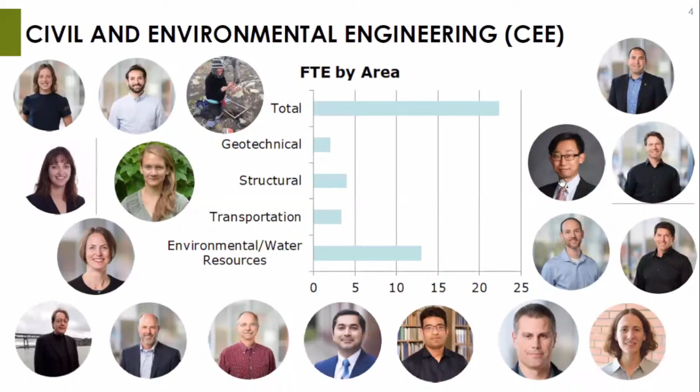Despite being a relatively small department, we do have quite a few achievements I'm very proud of. For example, my colleague at the top left corner, Dr. Diane Moug, just received the prestigious NSF CAREER Award, which is a kind of acknowledgement of her work in geotechnical engineering. At the bottom left corner, we also have Dr. James Pankow, who is a member of the National Academy of Engineering.

In terms of statistics, our department has on average an annual research expenditure of about 2.8 million. We're home to the largest earthquake shake table in the Pacific Northwest - for those not familiar with the terminology or geography in the US, that's mainly Washington State, Oregon State, and part of Idaho, sometimes also including Alaska.

We're also home to two of the most widely used simulation models for water quality. Every summer we have a lot of folks coming from all over the country for training camps to go over that software. We're home to the world's tallest barometer - that's the device you see first entering our engineering building. And as I mentioned, we have Dr. James Pankow, who has been doing amazing research in environmental chemistry and water resources, and who is a member of the National Academy of Engineering.

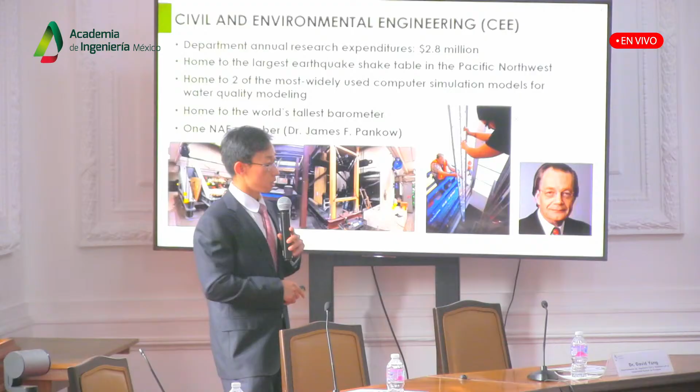This is an area that we started with my colleague, Dr. Thomas Schumacher, to fill in the gap of traditional civil engineering curriculum that is focusing primarily on the design of new structures. So we want to have some training for the future engineers to know how to handle existing structures, specifically not only the old infrastructure, but also a lot of the historic structures, where that preservation stands for.

My colleague Thomas Schumacher just got back from a trip to Egypt, where he did non-destructive testing for the pyramid, and interestingly found a previously unknown tunnel inside the pyramid thanks to their research. So that's something that we've been doing.

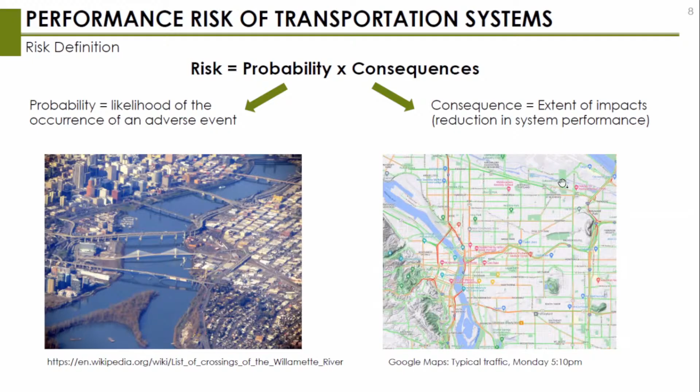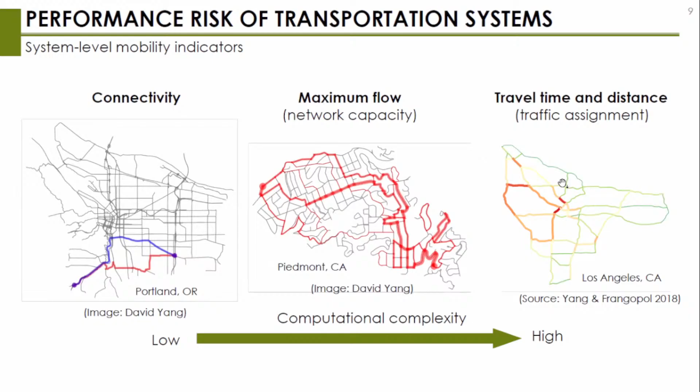That can be quantified by a wide array of performance indicators, from simple connectivity analysis to more involved transportation analysis demanding traffic assignment. All of those have been used in my research, and they have their own use. I'm happy to talk a little bit more about what indicator is the best for different use cases.

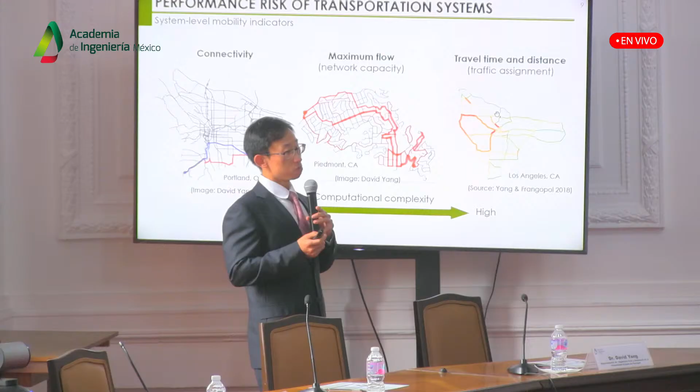But no matter what performance measure you use, you will face some real challenges when you are trying to do performance risk assessment. That brings us to the first topic: what are the performance risks for infrastructure systems under so-called catastrophic events?

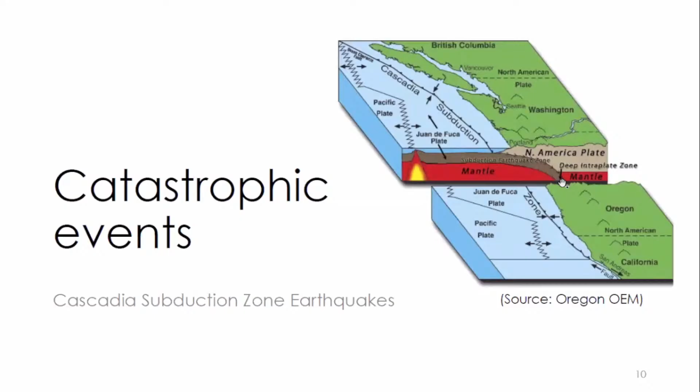The event that is relevant to us in Oregon, in the Pacific Northwest, is the so-called Cascadia subduction zone earthquake. Those are earthquakes caused by the subduction between the two plates, ranging all the way from British Columbia, Vancouver Island, all the way down to Northern California.

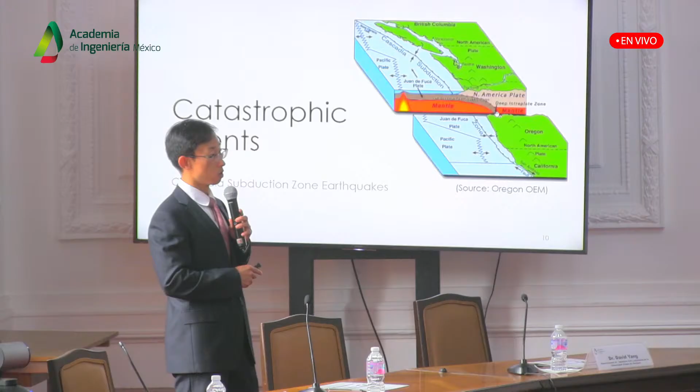This Cascadia subduction zone has shown to be really catastrophic in the sense that it can create earthquakes up to magnitude 9. The last time this happened was about 320 years ago, and there is a very high likelihood that this catastrophic event may happen again in the near future in our region. So our work is trying to figure out what will be the risk and what we can do to prepare for such catastrophic events.

So just a toy problem here to illustrate what are the challenges that you may face when you do performance risk assessment. The main challenges are first methodological.

So for performance risk, what we call those are risks that are not additive, meaning that you cannot do a risk assessment for one structure at a time and then add them together to form your system level performance risk.

So the toy problem here on the right shows that if you have this simple transportation network, if two bridges fail, by inspection, you know the traffic flow capacity will drop to 0. So the traffic flow capacity will drop from 5 to 0. So the risk is, the consequence here in this case is 5.

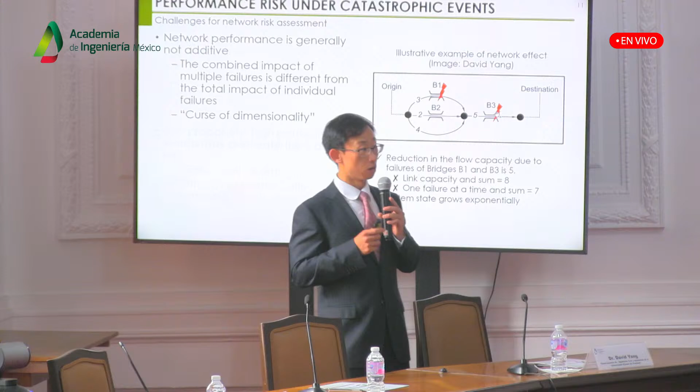However, you cannot recover this number 5 by doing one structure at a time analysis, no matter what performance indicator you use for that specific structure. So basically, this means that for performance risk, we really need to know the states of all the structures in my network in order to quantify the consequence.

So that brings in the challenge, computational challenge. And the second challenge is, when we are talking about risk assessment, there may be cases when you have a very low probability event, but very high consequences. We call those gray swan events. So that will make traditional sampling approach, typically Monte Carlo-based approach, impractical.

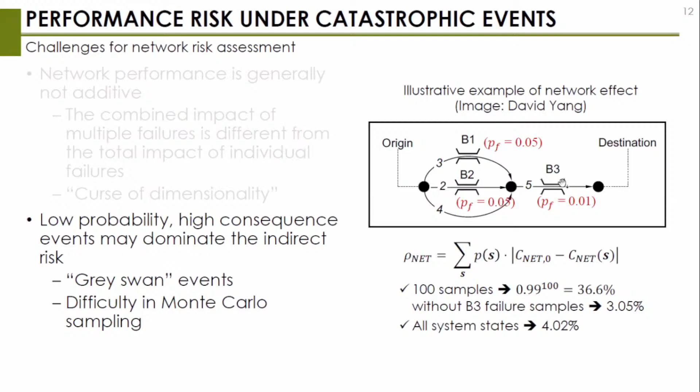So again, looking at this toy problem on the right, you see that if I put a failure probability for all these 3 bridges and then do a Monte Carlo simulation with 100 samples and evaluate the system risk, there will be a high chance that you don't have any failure samples for bridge 3, which will cause the underestimation of your performance risk. So that's another challenge of performance risk assessment for infrastructure system.

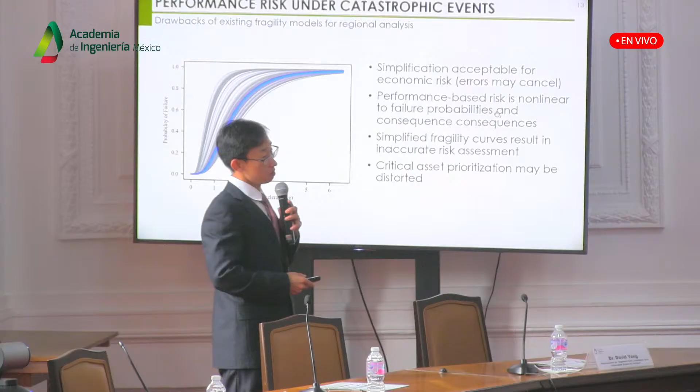So the other question we are trying to investigate is, for risk assessment, we need to know the fragility models. Traditionally, the fragility model tells you, given a so-called x-axis, which here is the intensity measure of a hazard, earthquake specifically, what is the probability of a structural failure or structural damage state?

So previously, for regional risk assessment, this is usually done by averaging out a group of structures and use that typical fragility curve here shown in blue to represent the likelihood of structural failure. This is okay if you are looking at economic risk, where you can add the probabilities of failures of different structures together to form your system risk, because the overestimated failure probability and the underestimated failure probability can just cancel out when you add them together.

But as I mentioned before, for performance-based risk assessment, it's a nonlinear function between the risk and the failure probabilities and the consequences. So that's why we want to know what are the implications of using this type of simplified fragility curves when we are doing a performance risk assessment, in terms of both the estimated risk as well as what will be the impact on the ranking of importance of different structures. So that's another question we're trying to answer here under catastrophic events.

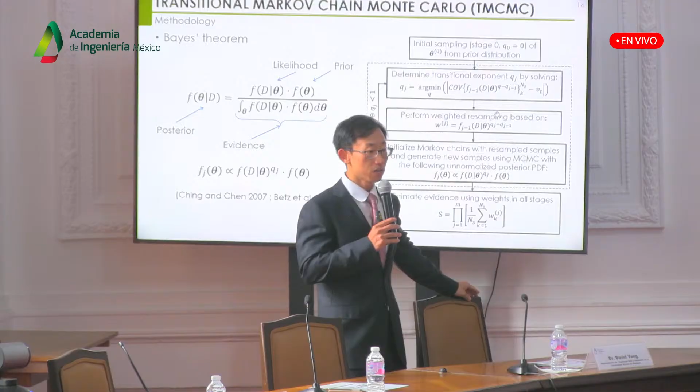And the approach we took here is the so-called transitional Markov chain Monte Carlo, or TMCMC. This is not an approach invented by us. Credit goes to Ching and Chen in 2007 and Betz in 2016, who first created or invented and then further refined this approach. It was traditionally used for, as you can guess, Bayesian updating, where you want to get the updated model parameters given some system output.

So here we chose this algorithm for performance-based assessment mainly for its great capacity to estimate the denominator in your Bayesian theorem, which we call evidence. So later on I will show. Our contribution is to build the connection between this evidence term in Bayesian theorem and the network risk assessment that we are interested in.

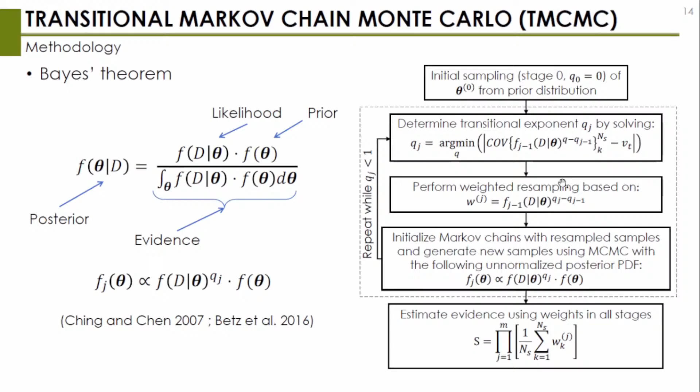So the modifications we implemented here is to adapt this TMCMC algorithm, traditionally used for Bayesian updating, to system risk assessment through the following 3 major steps. First, we created a transformation function to convert the discrete failure or damage state of a structure to a continuous state using a hidden variable.

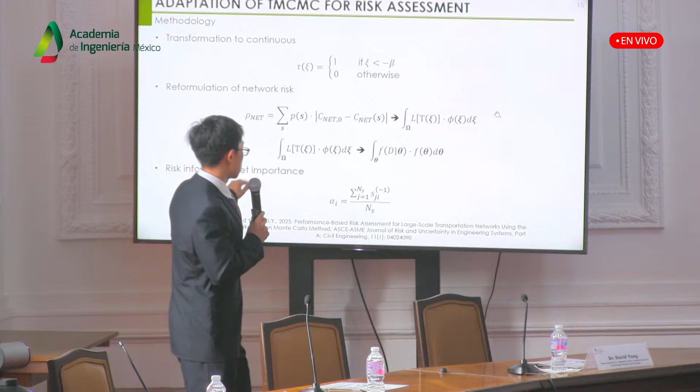That allows us to go to the second point, where the system risk can be formulated as a high-dimensional integral. And that integral, if you take a look at the second line of the second bullet point, you can see that it looks very, very similar to the evidence term that I presented previously in the previous slide.

So that allows us to use TMCMC to do the high-dimensional integral to solve the risk assessment problem, which will allow us to address challenges of curse of dimensionality as well as the existence of rare events.

And lastly, not only am I able to know the system performance risk, I'm also able to use this approach to know which asset or which bridge is more important in terms of carrying the system performance of the infrastructure system. So if you're interested in details, I listed the paper that we just published with my students.

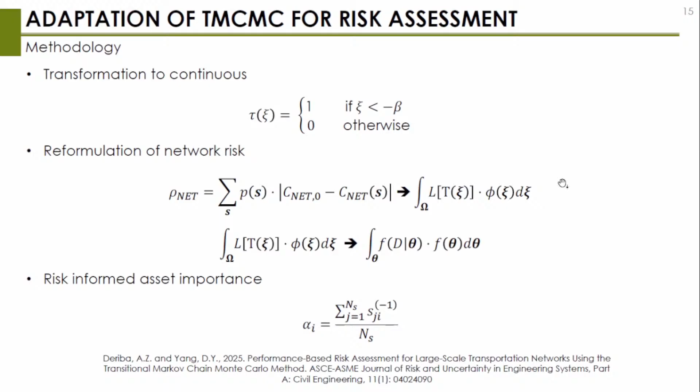Over there you can see a little bit more details about this approach. We use this approach for accessibility risk assessment in our region.

Accessibility risk here is mainly to evaluate the accessibility of communities to hospitals right after the CSZ event. We take a very simplified approach, a modified Hansen integral index, which is essentially the inverse of closest distance from a community to a hospital to measure the accessibility. And we use the change of accessibility to show what is the risk to our communities from the earthquake.

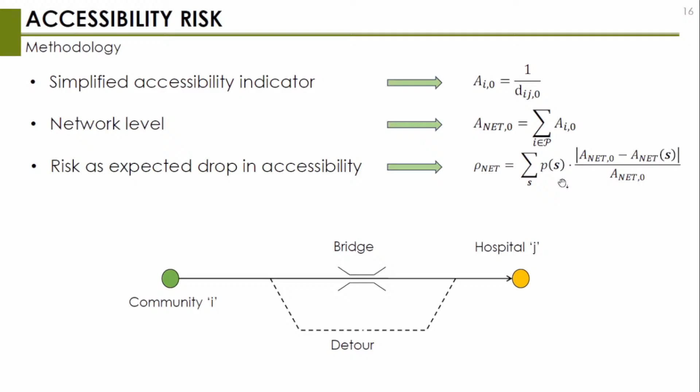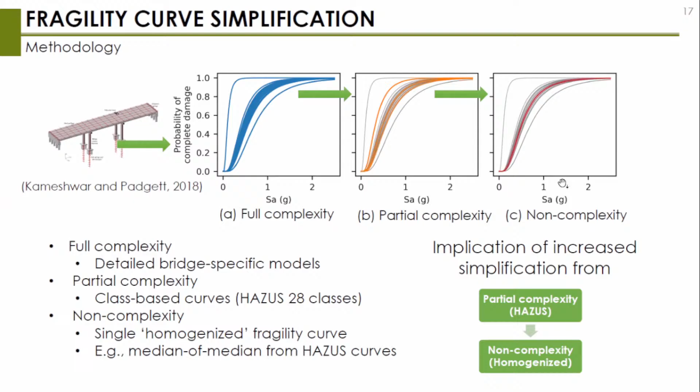The last question we want to answer through this case study is to see what is the impact of fragility simplification, as I mentioned before. Here we're going to compare the fragility curves from HAZUS with what we call the homogenized fragility curve, which we just use one single fragility curve to represent the failure probabilities of all the bridges in the network. We want to see what is the downstream impact of that simplification.

We use this approach, the TMCMC and the two sets of fragility models for a case study in Portland metro area. That's the boundary of our study area that includes the city of Portland, the neighboring counties, as well as the city of Vancouver in Washington, just across the Columbia River.

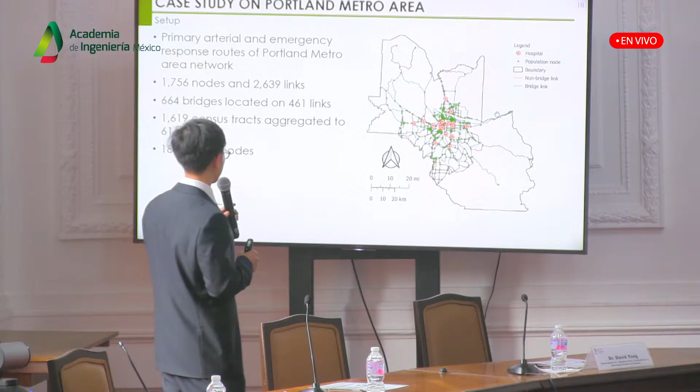What you see here are the arteries and the emergency response routes within this metro area, as well as the 18 hospitals that are located in our region. This network includes about 1,700 nodes and 2,600 links, with 664 bridges located on 461 links.

So it's a relatively realistic scale. It's more realistic than a lot of the academic examples that we have been using.

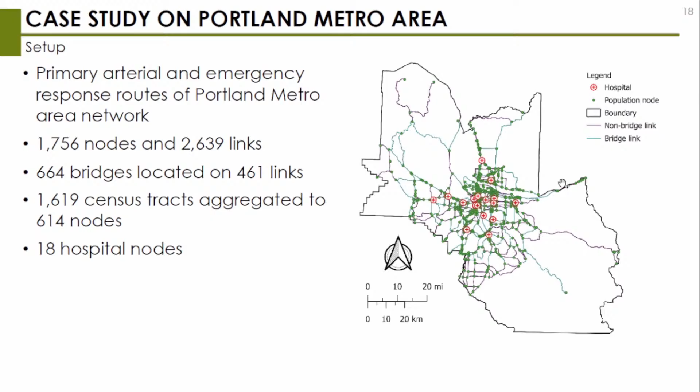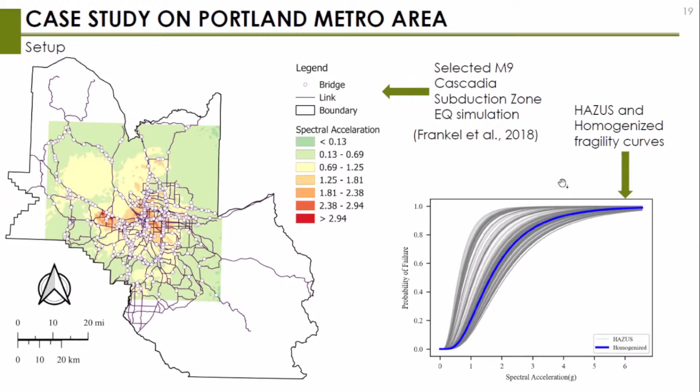For the hazard on the left here, what you see is the map of spectral acceleration extracted from the M9 project. The M9 project is an NSF-funded project that happened at University of Washington that wrapped up a few years ago. They generated a synthetic ground motion record for the Pacific Northwest region under the CSZ event. They considered a lot of the geology factors as well as the mechanisms of earthquakes to arrive around 30 scenarios of what will happen under the CSZ event.

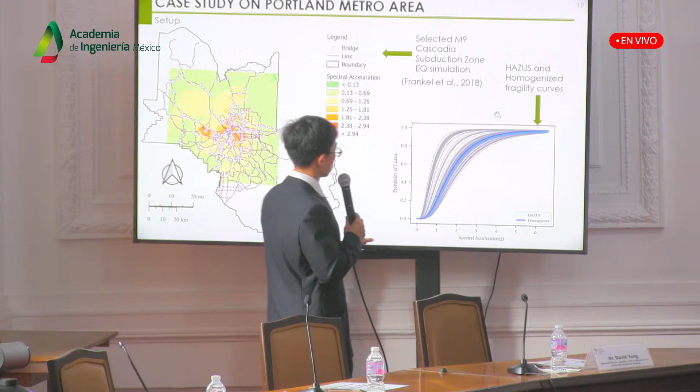We use this as input and consider the two sets of fragility curve. One is the HAZUS fragility curve that is relatively okay in differentiating the different structural failure probabilities, and the homogenized, this blue curve here, simply derived from averaging all the fragility curves for the structures in the region.

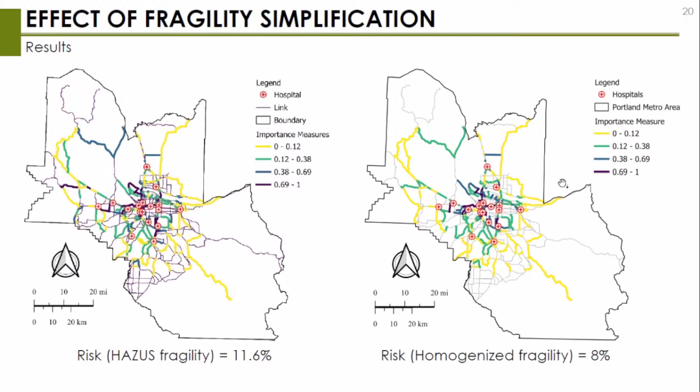For the figure on the right, what you see here are the same results using the homogenized fragility curve, where you only have that one averaged fragility curve for all the links, and you can similarly get the accessibility risk. In this case, this risk will be underestimated. Also, you will get the map of link importance.

Visually, you can see that using a homogenized or simplified fragility curve, the important links are more concentrated in the downtown core. But when you are using the HAZUS curve, where each bridge gives you a different failure probability, the important bridges are more spread out. So that's one of the implications of using a simplified fragility curve.

We quantified this by comparing the rankings of different bridges, comparing the importance factors of different bridges using the Spearman correlation coefficient. For decision making, what is really important is the top rank bridges, meaning the most detrimental, the most critical bridges in that network.

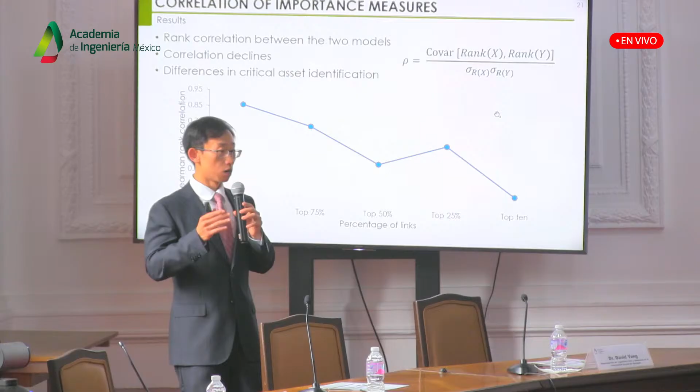As you can see, as I put my scope of focus more and more into the upper tail of the important bridges, the correlation starts to decrease, which means that using a simplified fragility curve will not give you a good ranking of your bridges in terms of importance. So it will kind of distort how you rank the importance of bridges, and have downstream practical implications, meaning that some of the important bridges will not receive resources for retrofitting.

So here's a more specific view. This is the top 10 bridges.

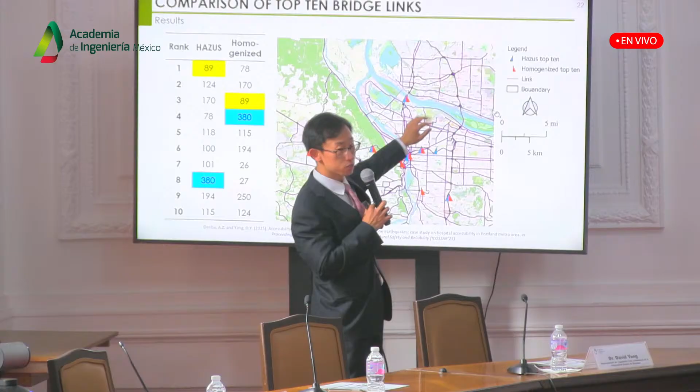Portland is located at this confluence between two rivers. One is the Columbia River, which is the boundary between Oregon—so the one on top in the north, that's the boundary between Oregon and Washington State. And then its tributary is the Willamette River, which separates the city of Portland into its west part and east part.

So our university is located on the west side of the river, but a lot of the residential area is located on the east side of the Willamette River.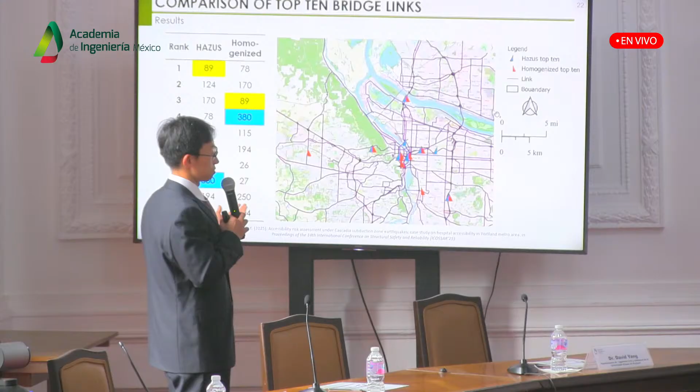This figure shows that using different fragility models, even though you have 7 out of 10 bridges that are similar or the same, the rankings are very different. And there are also 3 bridges that will be totally ignored if I use a really simplified fragility model.

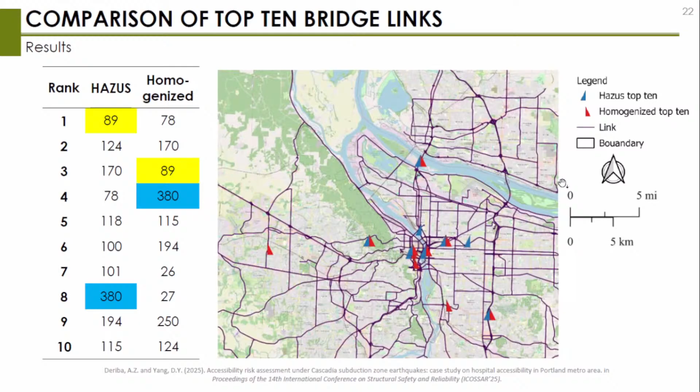This part of the work has just been presented at ICOSSAR 2025 in Los Angeles, so kudos to my student who did a great presentation there. Again, you can find the conference paper at the bottom of the page.

Using the same approach, what we are doing right now is risk assessment for what we call the Critical Energy Infrastructure Hub in Portland, or CEI Hub. This refers to a stretch of 6 miles that is industrial, with all the fuel storage tanks, so those are fuel terminals.

Oregon is unique in its status for fuel infrastructure, in the sense that in the state we don't really have refineries. This Critical Energy Infrastructure Hub, this fuel terminal, stores all the fuel needed for the city and over 90% of the fuel supply for the entire state.

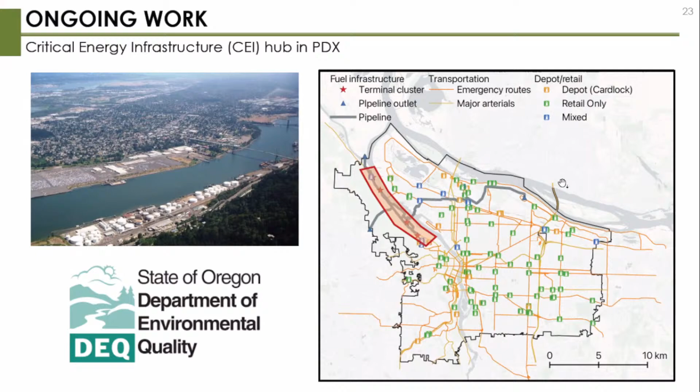As you can imagine, this is a huge concern for the state of Oregon, especially considering a lot of those tanks were built before the introduction of seismic code. And to make things even worse, those tanks are located in liquefiable soils as well.

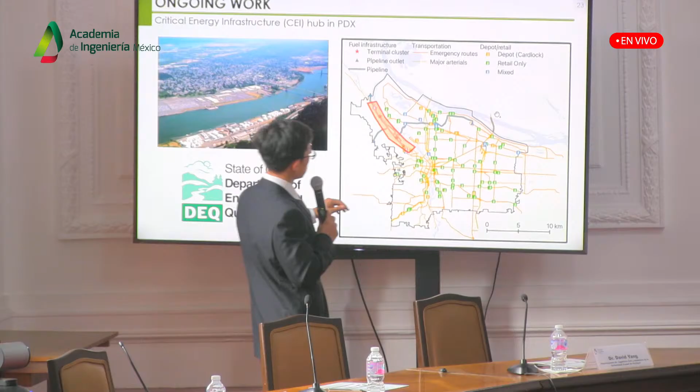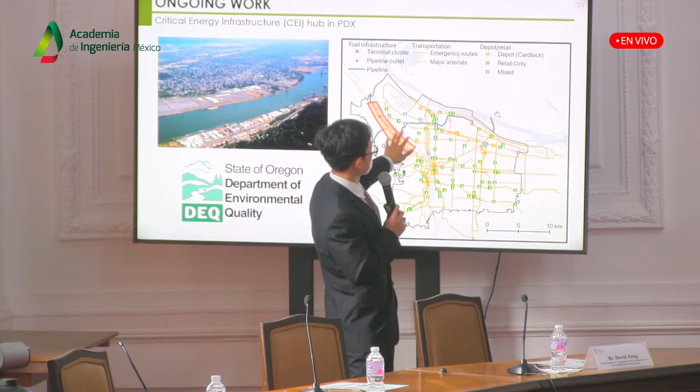But what we are trying to do here is consider the interdependency between the energy infrastructure, including fuel storage tanks, as well as the pipelines shown in the figure in gray curves, and the land transportation network that transports petroleum products or fuel to the gas stations. We want to see what is the risk in terms of fuel supply to our region when the earthquake happens.

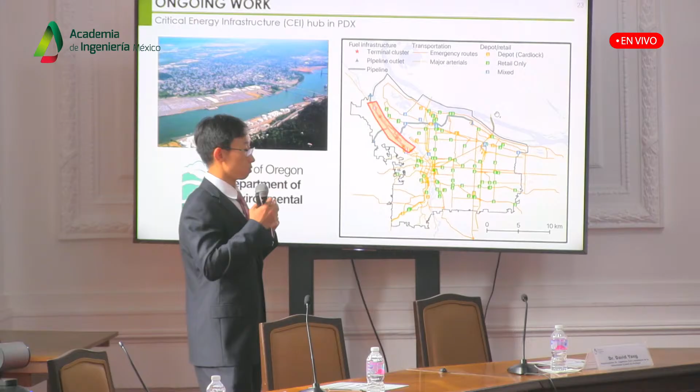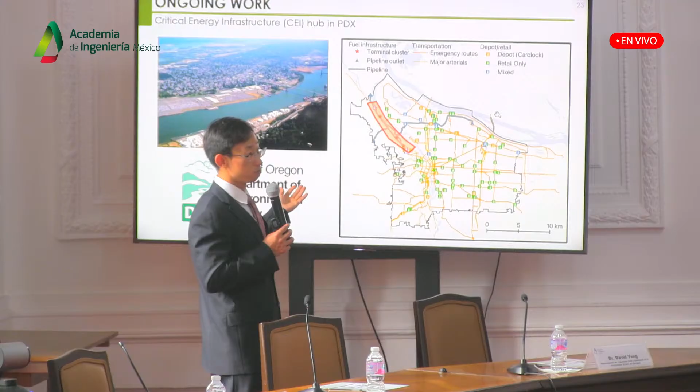This part of the work, we are currently working with the State of Oregon Department of Environmental Quality, or DEQ. You may ask why DEQ. This is because they are in charge of control and mitigation of fuel spilling. So that's why it's an environmental concern as well, and they want to make sure the tanks are seismically protected. We have also had conversations with the Oregon Department of Energy to see how this type of work can be expanded to the other fuel terminals within the state.

The second part of my presentation is on the climate change impact. The first part was catastrophic events, in the sense that you may have a lot of simultaneous failures of structures under that event. The second part is mainly focused on the challenge brought by climate change.

Specifically, although we have consensus on climate change's global impact, as civil engineers it's really hard to know what will be the regional impact under climate change, or to make things even worse, what is the structural-specific impact due to climate change, and how to quantify it. That's the challenge we're trying to provide some answers to.

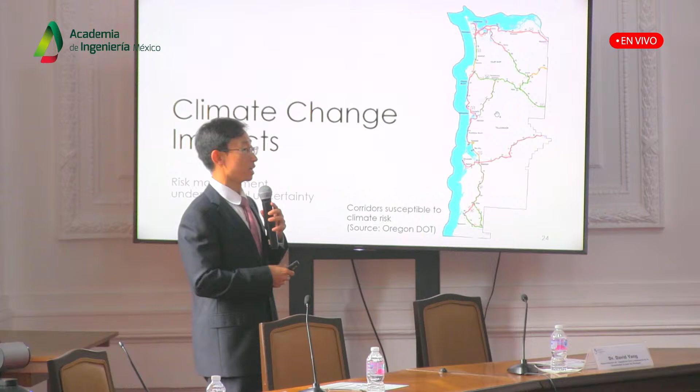I wouldn't say I have all the answers, but it's something we have been working on, in order to see how to handle that uncertainty when we do regional or structural level analysis under climate change.

To talk a little bit about motivation here, I want to give credit to Professor Akiyama from Waseda University, Japan, who prepared these nice slides. He's kind enough to let me reuse them.

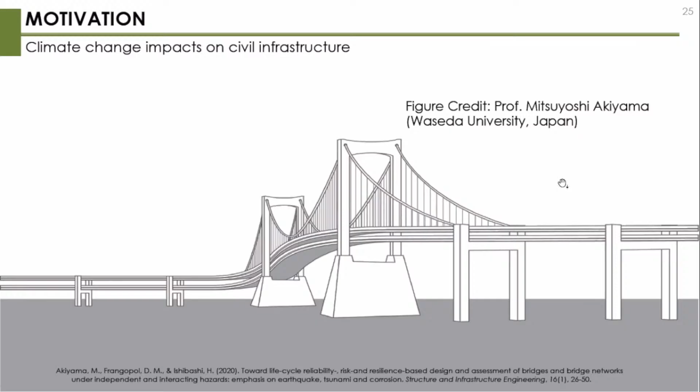For infrastructure, climate change can have a number of impacts conceptually. The first one is with rising temperature as well as humidity, the corrosion of rebars and a lot of steel parts in civil infrastructure may corrode faster, which will increase the life cycle risk under climate change impact.

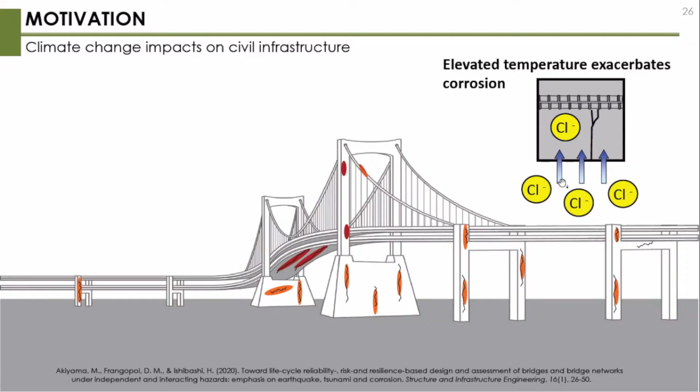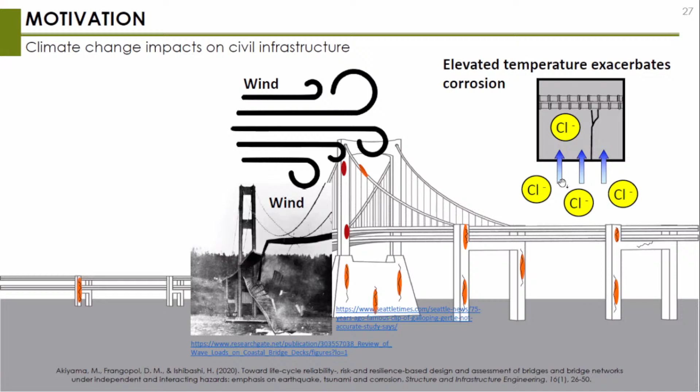Secondly, climate change can also change the frequency and intensity of extreme events. In this case, you have potentially more frequent or more severe wind events that may, in the worst case, collapse your bridge. But in this presentation, I'm going to focus on the other aspect of climate change that may also have rising frequency and intensity.

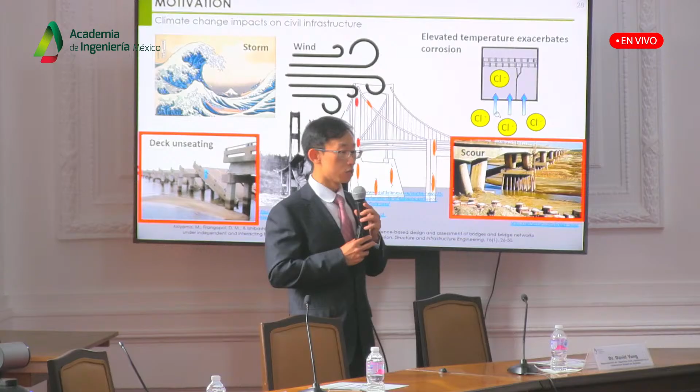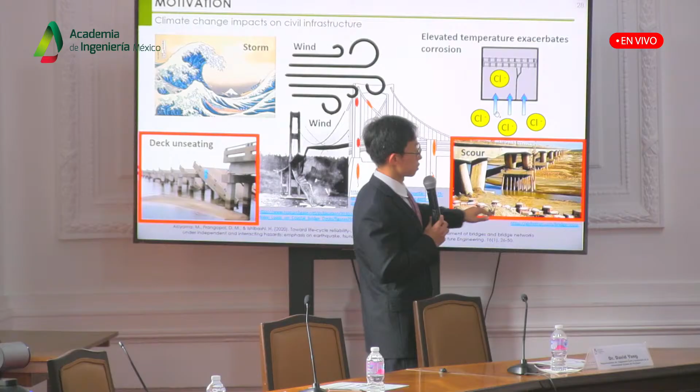This is due to storm and storm surge. A storm may compromise your substructure in the form of scour, creating a compromised foundation that reduces the load carrying capacity of your bridge. And for your superstructure, the wave may also push the deck up, causing what we call deck unseating.

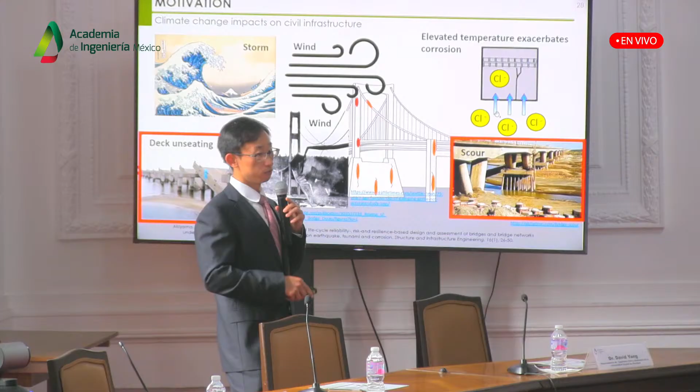That will decommission your structure, causing failure and consequences. The objectives here are to know what uncertainty is brought into the picture due to different emission scenarios, what we call climate futures, as well as global climate models. And then we want to know how to input those climate information into structurally relevant information.

So I know what will be the increased failure probability of different structures under climate change. And then we want to know how to capture the trend from a very wide noise due to the uncertainties brought into the analysis by climate futures and global climate models. And lastly, we want to know how to do decision making even though we have those deep uncertainties. That's the through line of what we are trying to answer.

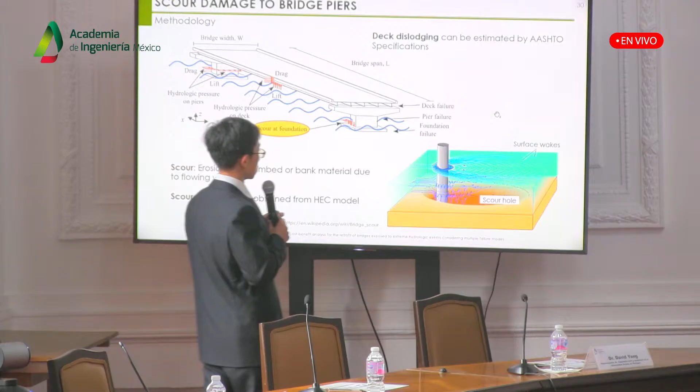These are the approaches we're using for these two failure modes. For the deck unseating or deck dislodging, we use the AASHTO design specifications, developed right after Katrina to better analyze bridge deck failure under storm surge from hurricanes. And for the scour failure, we use the scour depth estimation from the Hydrologic Engineering Center model, or HEC model, to know the size of scour damage under different flow discharge.

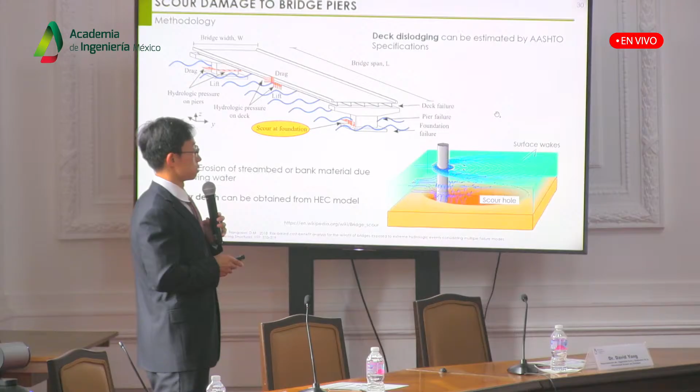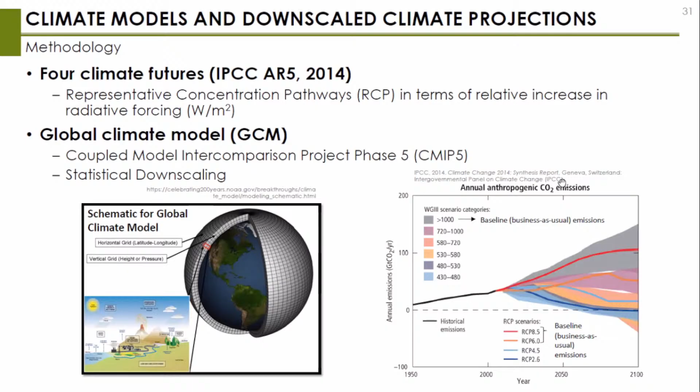We also want to tie the failure from those failure modes to the climate information. To do that, we're utilizing the four potential climate futures quantified or defined by the IPCC. In their terminology, this is called representative concentration pathways, or RCPs. You can imagine those as emission scenarios, whether the international community chooses certain emission policies or we proceed business as usual.

On top of that, in order to know the impact in terms of precipitation and temperature, there are also global climate models, also called general circulation models, or GCM. Those are used to give projected precipitation and temperature data at a global level in a grid format.

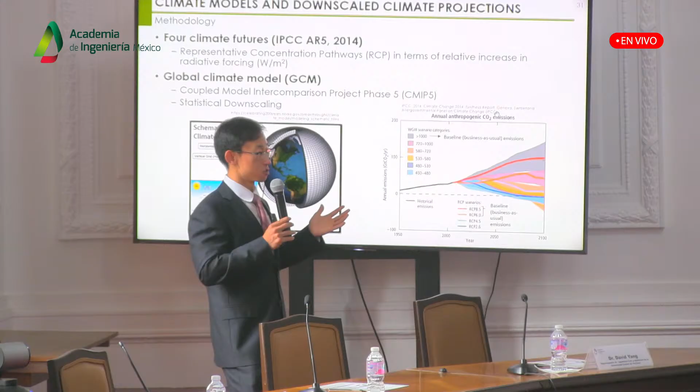The other technique we need to use is statistical downscaling, because each grid in those GCM models may be larger than the state of Oregon. So how do we use those global level models for the analysis? That's the downscaling that people have been doing, and we utilized the work from other statistical downscaled data.

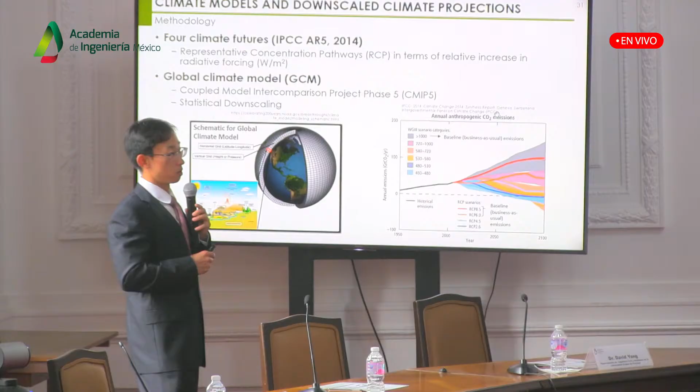Once we have the temperature and precipitation data, we can put it into the hydrologic analysis that considers the water balance and water cycle. Those are used to predict, under different climate futures, what the flow discharge will be under the impact of climate change. For that, we use the SWAT model, which considers different aspects of the water cycle process.

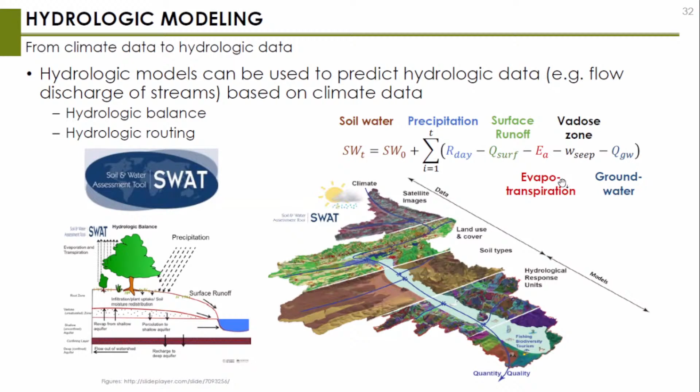What we're trying to do here is, based on the projected climate input as well as land use, soil condition, and slope condition from USGS, we want to know what the flow discharge change will be at different tributaries of the Lehigh River watershed, and then put that into the engineering model for scour prediction. That's the general steps we're trying to take.

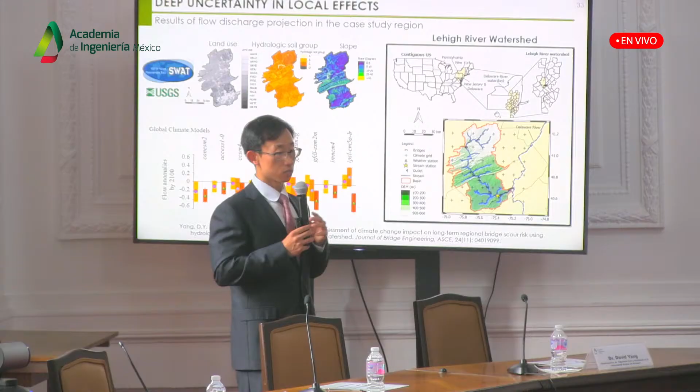The bottom left figure shows the wide range of changes from model predictions from either different global climate models or different emission scenarios. A lot of those things we do not know for sure—many are socioeconomic or political, so we don't really know how to predict them. This is part of showing that we face what we call deep uncertainty challenges when trying to do regional level analysis.

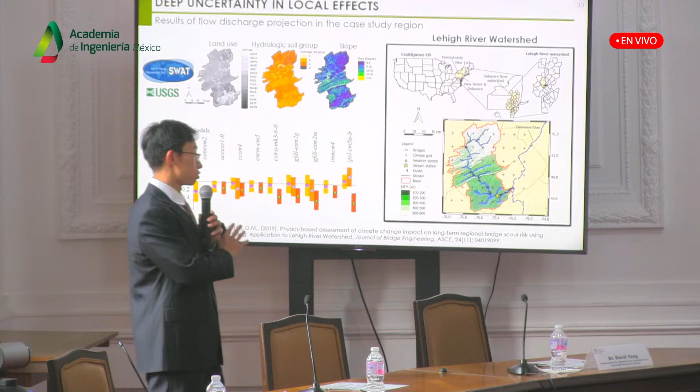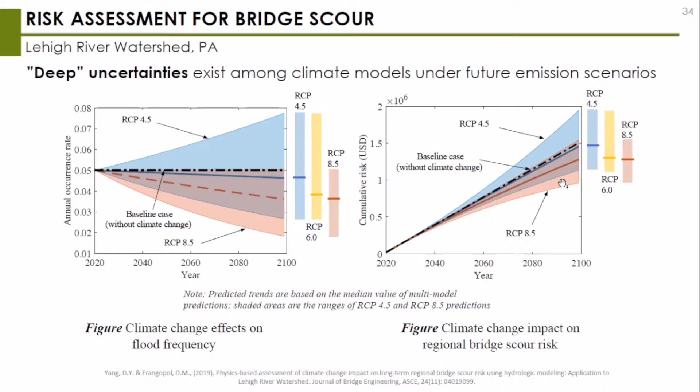If we then put those discharge values into the scour risk analysis, you see a wide range of possible scenarios under climate change impact. Some may severely increase the scour risk, but some may even decrease it. That's the motivation for the last part of our study: we don't want to use those deep uncertainties as excuses for inaction.

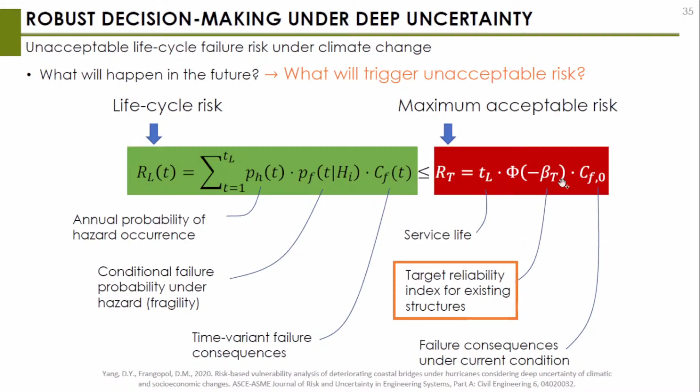So we want to know that despite those uncertainties, what we can still do. So that's a technique that we introduced here in adaptation planning called robust decision making under deep uncertainty. Again, this is not a concept that we developed. This has its roots in military operations for a very long time.

Rather than answer what will happen and then try to refine your prediction, what we are trying to do here is know what will cause unacceptable risk or undesirable consequences. So shifting the effort from improving the prediction to the decision-making process of what we need to do despite the uncertainty. For civil engineering, we used this concept to categorize the life cycle risk of structures under wide uncertainties, and then see when and under what conditions the risk is likely to become unacceptable.

So you may ask, what will be that unacceptable risk? That's where the red part kicks in, because this is putting back on my structural reliability research hat. In reliability analysis, we have this so-called target reliability index. So what we were able to do is recalculate or calibrate this tolerable or acceptable risk based on the target reliability index. Then I know that under different uncertainties, when I will have unacceptable risk. The underlying assumption is that society must have tolerated some type of risk, and we want to use that implied tolerance to decide when we need to take climate adaptation actions.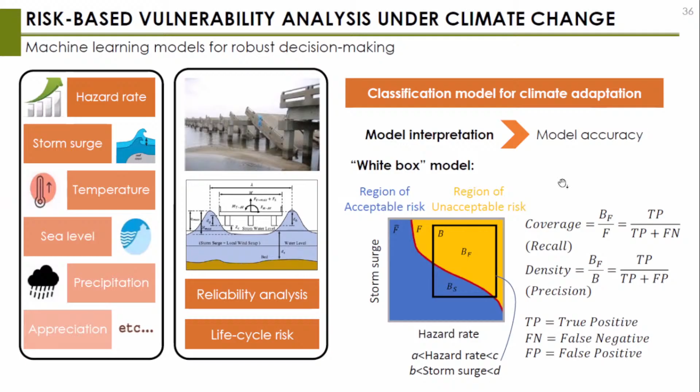So we use this concept in an example - this is that deck unseating example that I introduced before. On one hand, you may have factors with really, really high uncertainties, such as the hazard rate, the storm surge height, the sea level rise, the precipitation change, or God forbid if we have to predict appreciation or like deflation or inflation. Those are even more out of our expertise as civil engineers. So all those are factors with deep uncertainties.

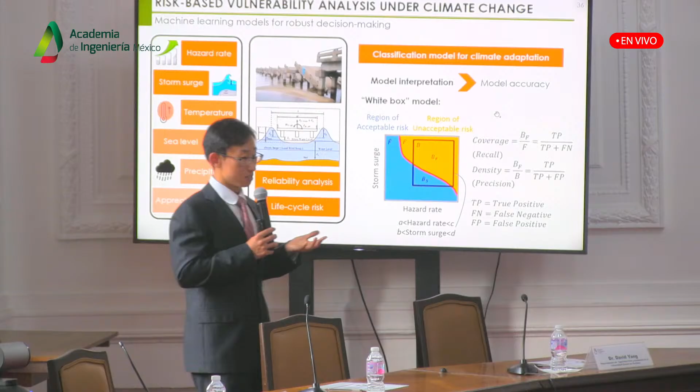What we can do is, rather than trying to predict the exact risk, come up with a model that can tell us when we will have unacceptable risk. So on the right-hand side, I want a model that has better interpretability to decide whether we have unacceptable risk, rather than just a model with good accuracy of judging if I have an unacceptable risk.

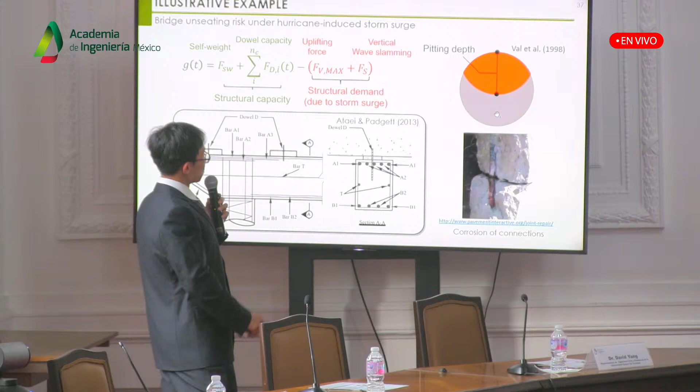So we use that for a very bread and butter structural reliability analysis. That's where you see this performance function, where you have the structural demand coming from the AASHTO code as well as different climate relevant factors. The one on the left in green is the resistance model, defining the structural bearing capacity of this connector between the deck and the substructure.

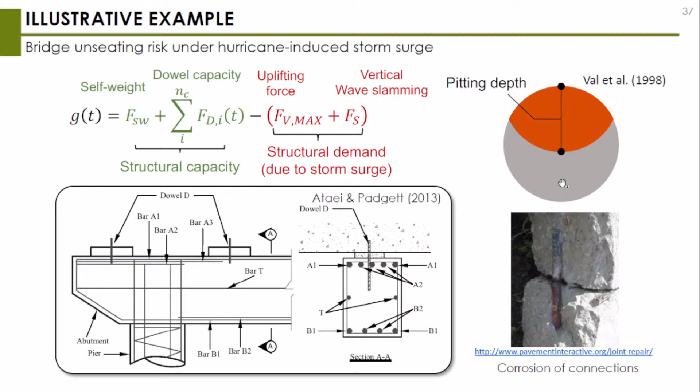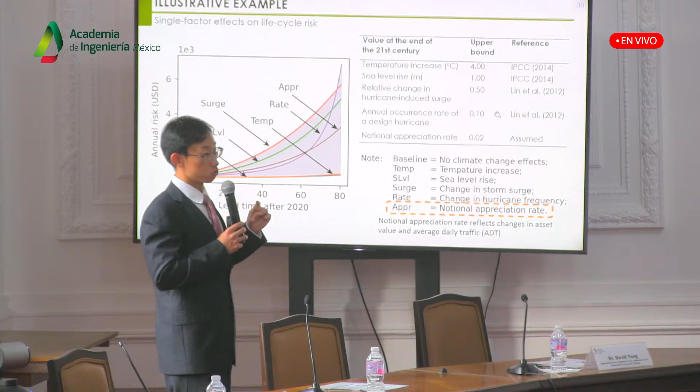So here we consider 5 different factors that we know may change under climate impact. We also know that at the structural level, I have no way to predict accurately - I can give you a range of how those factors may change, but it's impossible to know the exact value. On the left, you see those pathways or potential life cycle risk profiles for this connector, showing a wide range of possibilities for this specific structure.

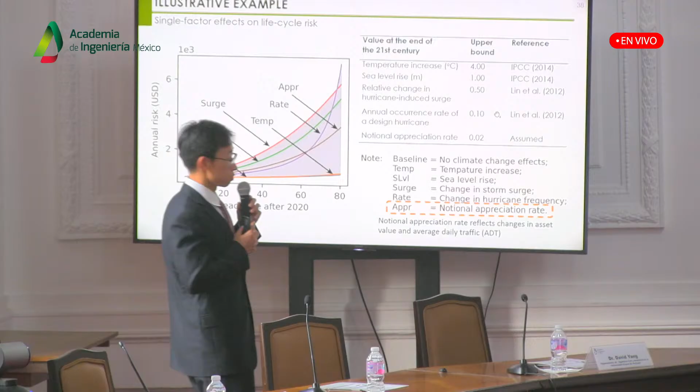So what we are trying to do is not pick a line in this shaded area saying this is what's going to happen. Instead, we try to see, among all the factors with uncertainties, which factor is more likely to cause us unacceptable risk. For that, we use samples from Latin hypercube sampling with ensemble learning to rank the feature importance.

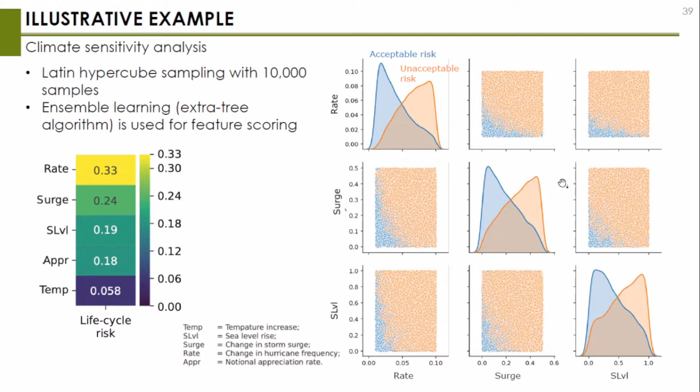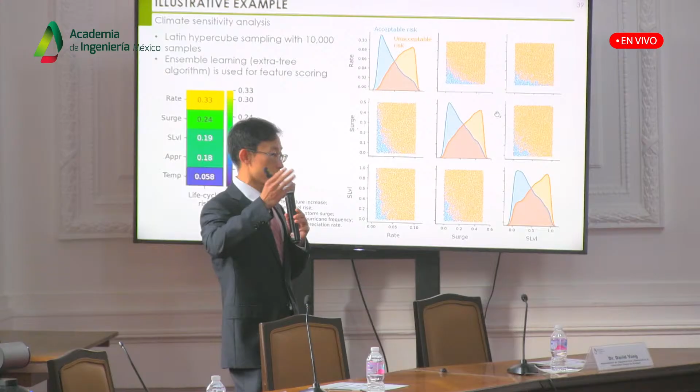We noticed that the rate of a severe hurricane is the number 1 factor that will cause unacceptable risk over the lifetime of a structure, followed by the storm surge heights under a hurricane. The temperature, on the other hand, even though we're pretty confident it will rise by a significant margin, will not impact the life cycle risk to a significant extent - it's not likely to cause unacceptable failure risk.

Lastly, not only do we want to know which factor dominates, we also want to come up with rules that decision makers can use to set up what we call a climate signpost, so they can monitor over time what rules to watch so that when a rule is violated, I know I need to strengthen this structure.

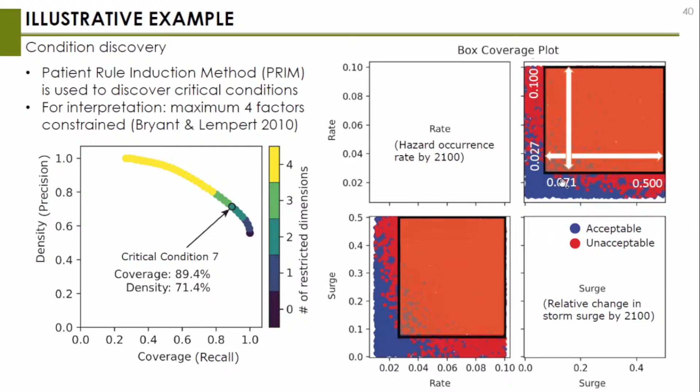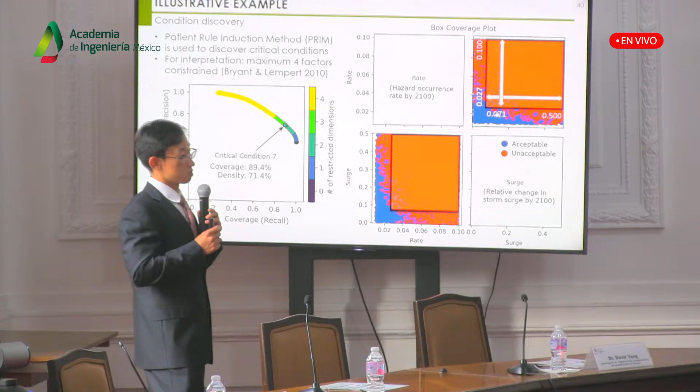So to do that, we use this technique called patient rule induction method to find simple rules that discuss what is the likely criteria to follow to know when you need to do climate adaptation action. For this example, we have the storm surge and the rate of hazard. So when the storm surge increases by 7% or more, and hurricane frequency increases by 2.7% or more, and you are relatively confident about those two factors, you really need to strengthen your structure—either tie down your deck, otherwise you will have unacceptable life cycle risk under storm surge.

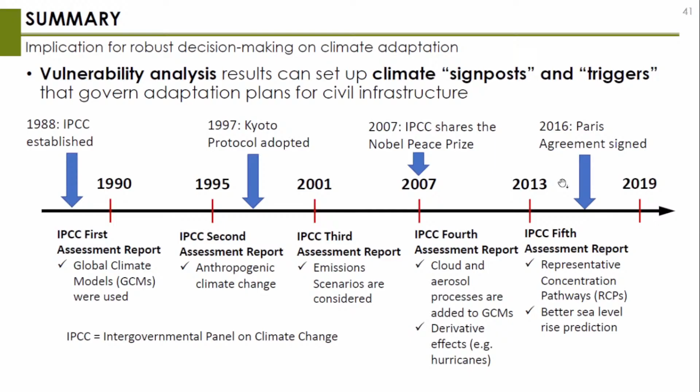This pairs very well with the periodical review and updates of climate projections from the IPCC, the Intergovernmental Panel on Climate Change. So what we propose is anytime you have a new IPCC report giving updated knowledge about the future, you can update your belief of what will happen. In the previous example, you will have a more concrete belief of the storm surge increase and the storm frequency increase. That tells you if you reach the rule you set up, you need to do climate adaptation actions. So that's our vision of how this can be used by decision makers to plan for climate change despite the uncertainties involved.

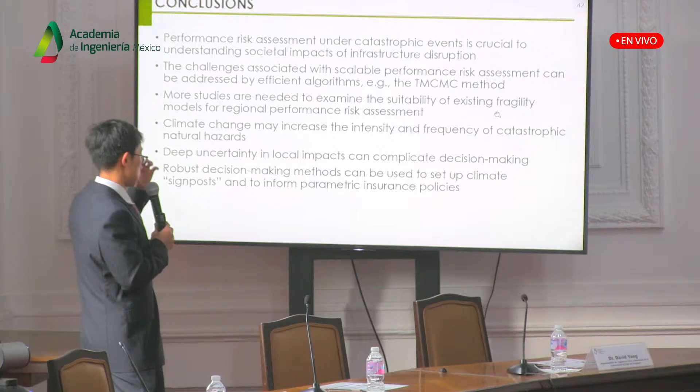So the last slide is just a high-level summary. Performance risk assessment under catastrophic events covers events crucial for understanding the societal impact of infrastructure disruption, because we are analyzing a specific performance indicator relevant to the community. Second, there are challenges when doing performance risk assessment, mainly tied to the existence of rare events as well as the curse of dimensionality—it's really hard to scale your analysis.

This is addressed in our research by the TMCMC. But we do need more research to see what will be the impact of different fragility models used in performance risk assessment, and our group is trying to do that in more detail currently.

For the climate part, we know climate change may increase the frequency and intensity of natural hazards—in the examples I gave, mainly flood and hurricanes. But we also need to realize there are deep uncertainties when we look at only one county, only one structure. In that case, robust decision making is, in our opinion, an effective way to make decisions about when we need to strengthen our structure.